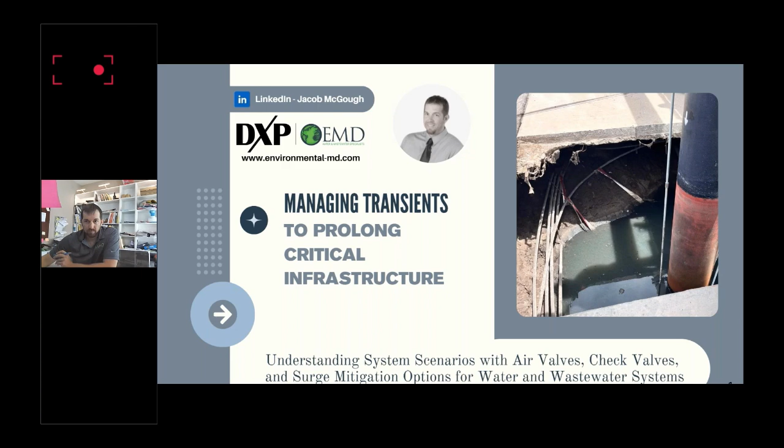Turn my camera off here and get to the presentation. So greetings, everyone. Hope you all enjoyed Ryan's presentation on gate valves and hydrants. Hopefully you guys learned something from that. Like Kurt said, I'm Jacob McGough. I also go by Jake. Just a little bit of a quick intro of myself.

Got my feet wet back in 2006 into the water industry with the manufacturer direct. 2010 shifted over to the manufacturer's rep role. So from 2010 to about 2019, I was out in the Rocky Mountain region. And then in 2019, I began working here in the Sunshine State with Environmental MD and Florida Valves. So my role is essentially as a manufacturer's rep, looking over the state of Florida for the principals that we represent and trying to get those into the market and help end users, engineers, and everyone in the industry, distributors, contractors, you name it.

So today, the presentation I'm going to be talking about is managing transients to prolong critical infrastructure, understanding system scenarios with air valves, check valves, and surge mitigation options for water and wastewater systems. It's quite a mouthful. This can be a touchy subject, so hopefully I hit some points and make some sense going forward as we all try to make things better as we build.

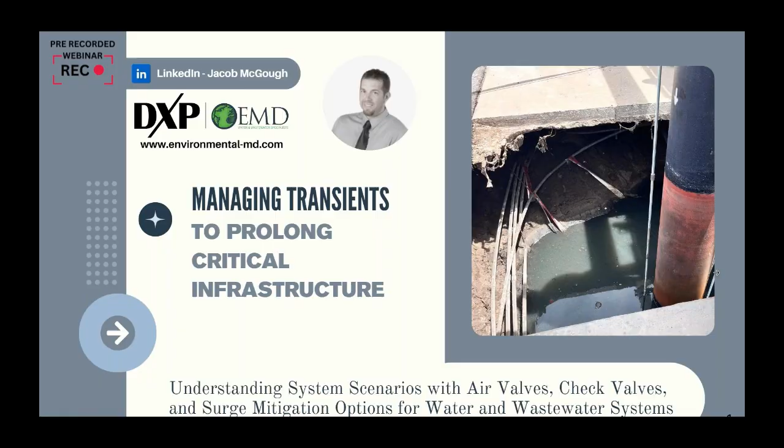So I'm going to start out here trying to approach this with the mindset of the ACT approach. If you guys walk away and try to remember anything at the end of this conversation, it's ACT: air valves, check valves, and transients. I've really focused on the transient portion, just because whether it's potable water or pressurized sewer force mains, it seems like there are a lot of issues out there. And not picking on Florida per se, but it's around the entire U.S.

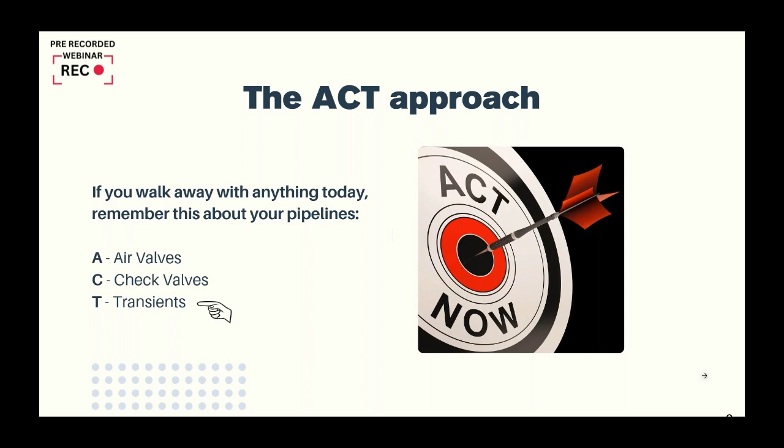So I'm going to peel into this, peel the curtain back over the next 3 slides, and then we'll go into a little bit more detail.

Understanding system scenarios. When we talk about a pump station or a pipeline, whether it's potable water or wastewater, typically we always think about normal operations. What we need to be considering also is worst case scenarios. So potable water and pressurized sewer force mains must be designed around worst case scenarios, under all operating conditions. And I stress that all operating conditions, and this includes pump trip. It is always best to have a computer surge analysis done, as there are quite frankly too many variables within a piping network. We've seen the hand calcs underpredict and we've seen them overpredict. So just something to keep in mind.

So where does this take us? Or maybe better yet, why do we need a surge analysis? Possibly to determine why the pipeline is breaking, maybe for new designs so the pipe doesn't break, or possibly to ensure that the pipeline stays pressurized to meet regulatory requirements. That's obviously on the potable water side of things.

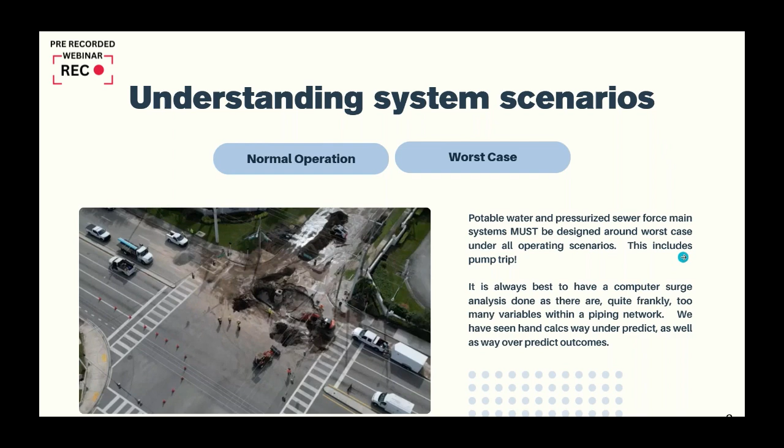So again, painting a picture here, kind of understanding system scenarios, and going through a couple of things before we really dive into some details.

It starts with the pump station, and we have a little layout. The layout of the pump station, we'll know pump curves and everything. Then we can figure out what the pipeline and profile is, what are the pipe materials, and obviously there's going to be pipe size with that as well.

On the potable water side of things, there's going to be storage tank levels possibly to be aware of, and then we need to know some operating scenarios.

So steady state is a term here, if you want to think of this as maybe normal operation. Inside of a hydraulic model, once the steady state is confirmed, then it can move to the next step at the engineering level.

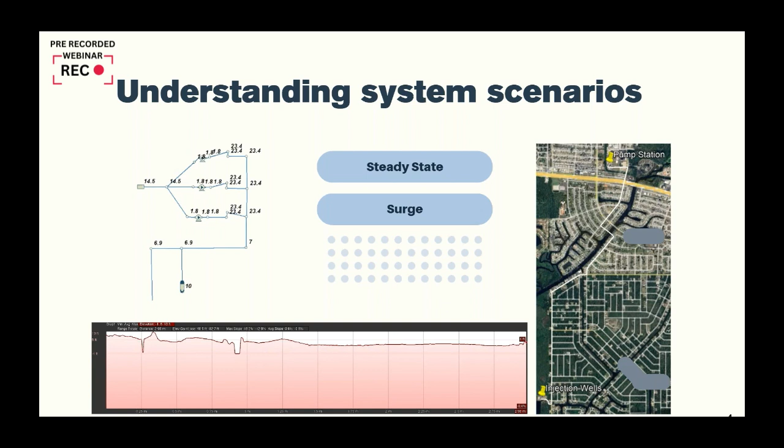For surge, which in most cases is usually the worst case, and it typically involves a pump trip. So with steady state complete, it's kind of time for a surge. I'm going to start out with the ACT for air valves here. We have a profile here with several air valves on it.

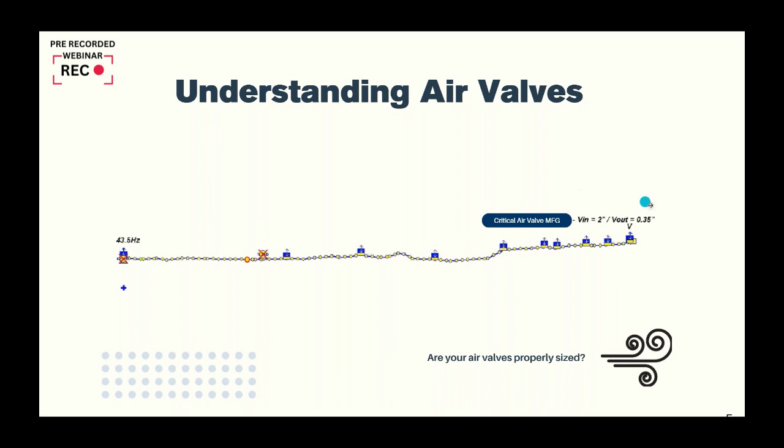And what I want to really point out is all of these air valves, technically they should be sized correctly. Now, there's usually a critical air valve or two in this system, and I like to point out and ask the question: are your air valves properly sized?

So before I get into that, I'm going to stop on the subject of air, confined space entry, and air valve air monitors.

Here in Florida, vaults and everything are kind of a little bit scarce, but I think it's a good subject to go over, throw a little safety in here with confined spaces. If you guys are ever in the field and entering an area considered a confined space, just make sure to check the air with a proper air monitor before you proceed into that confined space area.

Air valves, like Ryan said in his previous presentation, he referenced AWWA. Most valves have a standard that all the manufacturers have to conform to and meet those bare minimum standards. One thing most folks might not be familiar with is there's another standard that goes along with the air valve AWWA C512 standard, and it's the AWWA M51 manual.

Essentially, to pluck out something specific here, this basically says vacuum venting capacities for all air valve manufacturers state a design basis of 5 psi differential at 60 degrees Fahrenheit and a 0.6 coefficient to come up with the air valve CFM capabilities.

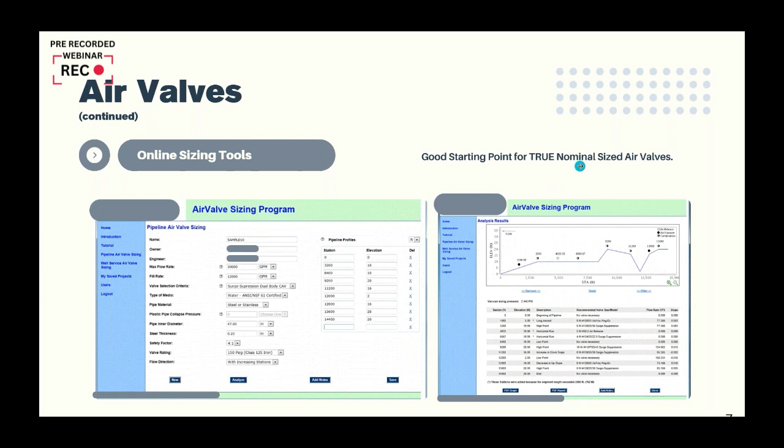But one thing here in Florida, we're quite flat with our topography, so slope is not as prevalent, if you want to say, but there are some areas that obviously have some hills and valleys. And this is a good starting point for true nominal sized air valves.

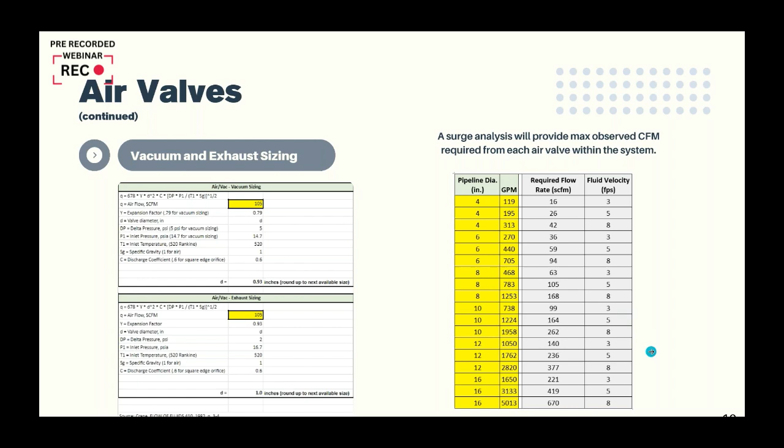So just to put this into perspective of what we talked about, I said a 20-inch diameter force main with this 4-inch riser I mentioned earlier. This is properly sized because on a 4-inch at 8 feet per second, we have 1048 CFM required if we're designing around max fluid velocity in a pressurized sewer force main.

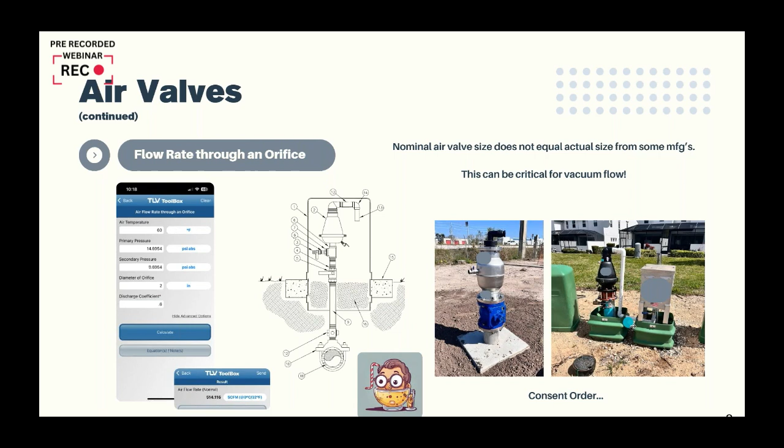Majority of the flows are designed around between that 3 and 5 feet per second. So even if we looked at the 5 feet per second mark, we need 655 CFM, which essentially equates to a 3-inch air valve. So we definitely have something in question here to look at with some of the air valves out in the field.

Taking this a step further and looking a bit more in depth, we went over a manual way of sizing air valves, a couple of different methods for checking true nominal sized air valves. The ultimate check, however, is to have a surge analysis done, which will tell each node inside that model where each node is at. You're going to have an air valve tied to it if that node has an air valve on it, and essentially we'll be able to see the exact CFM required.

Using a force main as an example, we can go out into the field. Consulting engineers can also do this, your EORs, and essentially walk or drive the line and figure out where all the air valves are at, just doing some discovery and investigating work. We can see right out of the gate, on this particular example we're looking at, we have nominal sized air valves that are called out, but the inlet outlets are different.

And these inlet outlets are quite critical when an engineer or a hydraulic modeler is inputting that data into the model for the surge analysis to be done, because these figures directly affect the outcome of what we're going to see. Again, just referencing, I've got a couple of keynotes here, 1, 2, and 3.

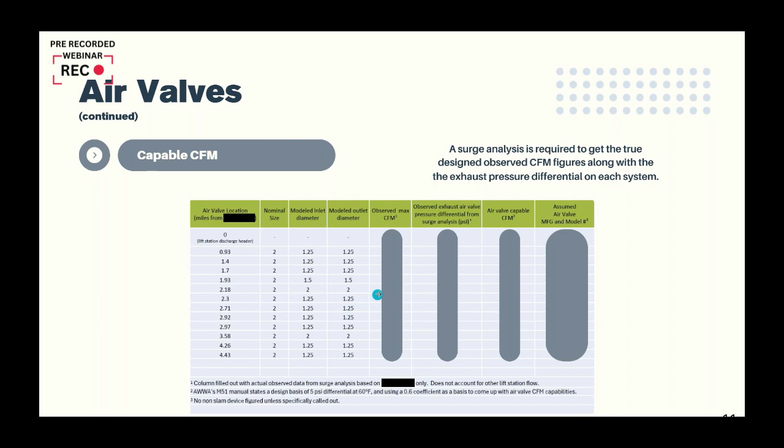Going back to this 2-stage, 3-stage concept and how these are modeled: if a hydraulic modeler is just modeling standard air valves, they're going to put not the nominal size, but the smallest orifice into the analysis software. Now if they are seeing air slam, the modeled inlet stays the larger inlet, but the modeled outlet will be modeled with a smaller figure to address that air slam event within the model, mitigating it so that when it gets into the field, the issue has been addressed. That's the term 2-stage, 3-stage.

I wanted to point that out. I really think going forward in the years to come, this is going to get a lot more traction and attention, and ultimately lead to - in Florida specifically, everything is driven around county or city standards, and then an APL is tied to that - I think performance-based language is going to have to be added to help mitigate and address potential larger issues that may be happening.

Hey Jay, so yeah, go ahead. I'm sorry, let me - I was trying to find a good time to jump in and ask this without interrupting you. Sorry about that. Kevin Smith, I'm just going to read his question here.

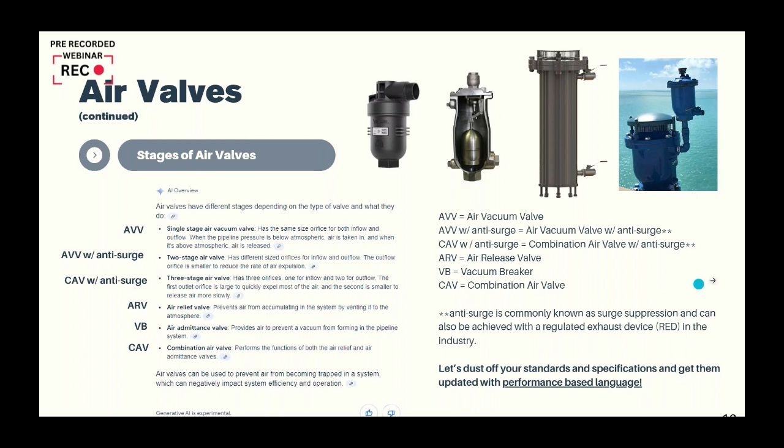He says, we don't size air valves based on the size of the riser, but rather on the size of the force main or transmission pipe. I noticed that you mentioned the riser 4-inch and the required CFM. This should be based on the 20-inch pipe instead, correct? Yeah, Kevin is correct, yes. Okay, yep, it's the airflow in the main pipe, correct? Or sorry, it's the fluid velocity or gallons per minute in the main pipe that we're pumping. Yes. Okay, very good, thank you. Yep.

So flipping over to check valves, this is the C in the ACT acronym that I mentioned earlier on. There's essentially 4 main criteria for check valve selection.

Check valves play a role in transients. They can help mitigate, and they can also induce transients with check valve slam. Proper selection of pump discharge check valve is critical in water and wastewater pumping systems. Its primary role is to open for forward flow and close to prevent reversal flow when the pump is off. To avoid check valve slam, which occurs when reversal flow suddenly stops, an automatic valve must close very fast, or use an oil dashpot device for slow closure.

Check valve closing speed is also dependent on system back pressure as well. Now, one thing I'll throw in here before I forget: medium speed is generally typically observed as bad, because that's where we will see check valve slam.

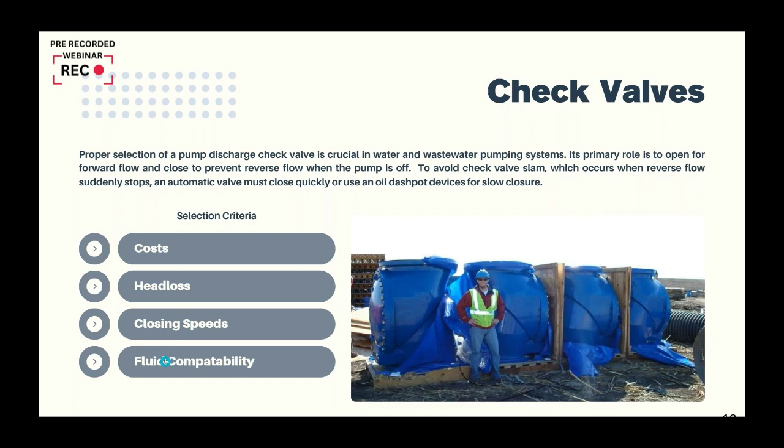Getting into the criteria here: cost, head loss, closing speeds, and fluid compatibility. Costs associated with check valve considerations for a system do come into play. Is it the best thing to base the design around? Probably not. There are a few pictures here.

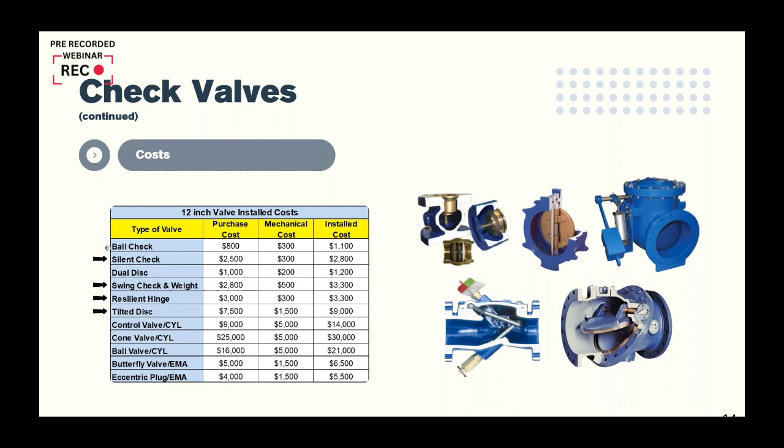I wish I had the Jeopardy music I could play right now. Hey, while we're waiting for that, Kurt, I'll tell a little safety story here also.

So a few years back, probably 16, 17 years ago, I was at a job site in New Mexico adjusting a large slide gate. And essentially what we had to do - the contractor took this whole thing apart and I had to put it back together and readjust this thing. This was a very large sluice gate, actually a cast iron sluice gate, and I'd adjust all the wedges.

After we got done adjusting all this and checking it out, essentially we had to pressure test it. That entailed raising the gate a little bit and then immediately closing it, just to kind of unwedge and wedge it back in to make sure it was going to seal. Problem is, we had one wedge slip on us. So I'm at the bottom of this containment area, 60 feet deep probably. There's a 40-foot extension ladder going down to a platform, and then another extension ladder leading up to that.

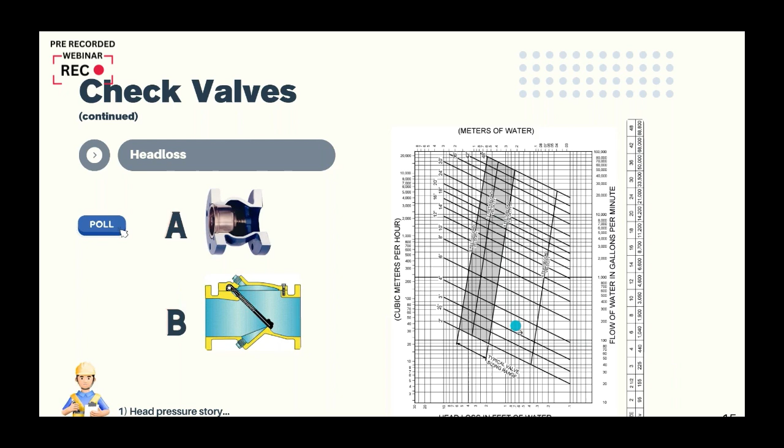The answer to this here was A. Obviously, everyone's correct. With check valves, every check valve has a head loss chart. That head loss chart also more than likely has the CV, which consulting engineers utilize to size correctly. So I just want to point out the head loss chart here, a typical head loss chart per se.

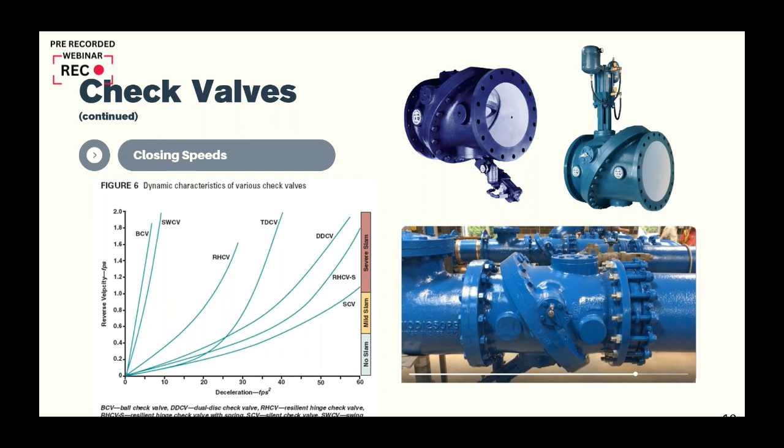So you guys, for these videos I'll play going forward, they don't have any sound, so I'll just narrate a little over them. This first one is fairly quick. Essentially what we're going to be doing is watching the check valves close, and there's this bottom mounted dashpot on there as well. So it's open now, and you see it closed—probably about a second there.

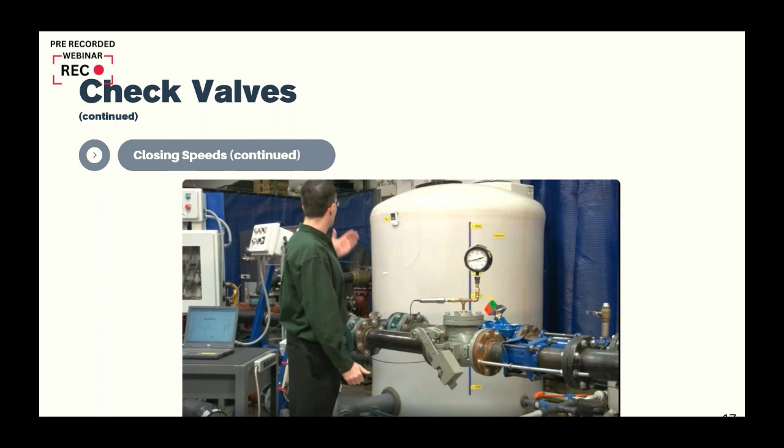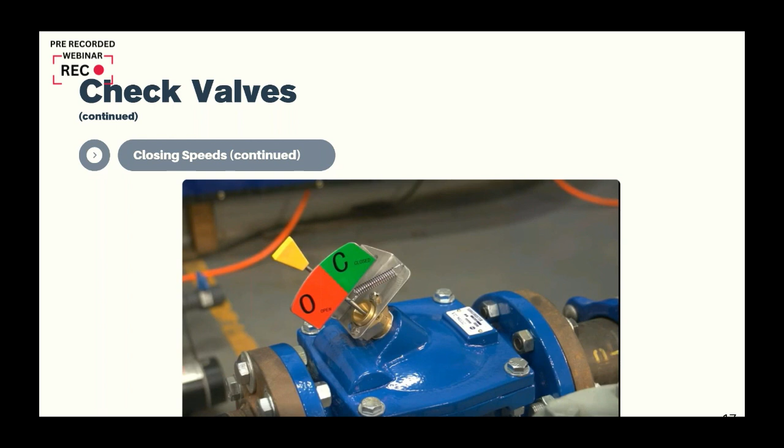So this next video here, we're going to watch two videos in series. The pumps are going to start. The flow is going to go through the check valve, and this pumping system is pumping into a hydro tank. There's a pressure switch on that hydro tank, which once we get pressurized up—I think in this case it's 80 PSI to that tank—that switch will essentially trip the pump, and then we'll see what happens to the system here. Feet per second was displayed there. Pressure is going to get to 80.

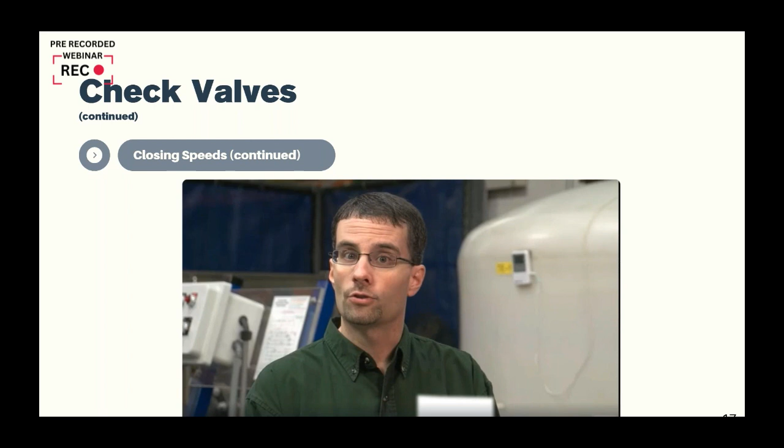And essentially we have silent closure. There's really no audible slam with the resilient hinge check valve with this spring. We can see what happened here with the pressure monitoring, measuring at the transient level. When I say pressure monitoring at the transient level, that device is essentially measuring at 100 samples per second, so it gets a really good resolution. We can see over static, we really only bumped 20 PSI, so that's a pretty soft closure.

The other thing we want to watch for, whether doing lab tests or field tests, are these closing times—how fast did that check valve close, or how long did it take to close. In this case, that resilient hinge check valve with the internal spring closed rather quickly, so we didn't get any pressure spikes here.

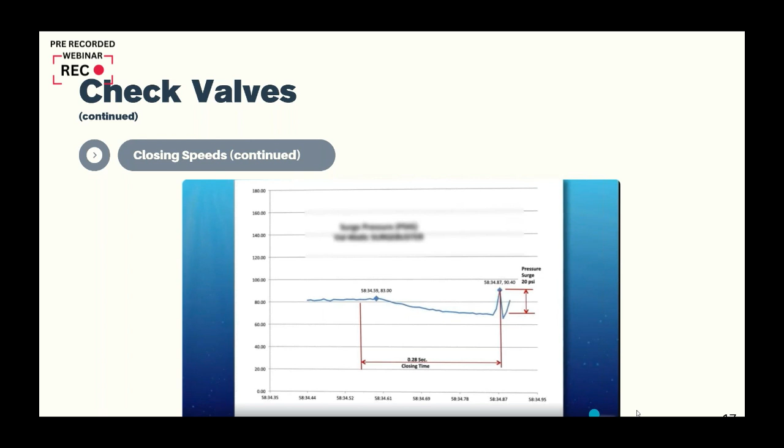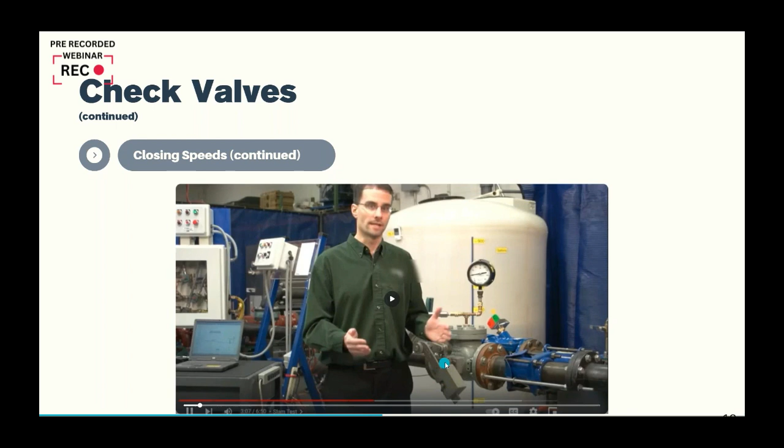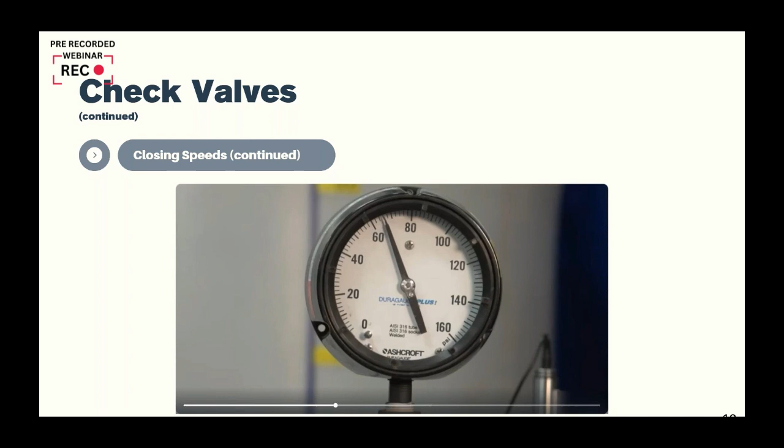So this second video, we're going to watch the same thing, but instead with a conventional lever and weight check valve with an air cushion, if you guys can see that in this picture here. Again, the flow is going to go through the check valve into the hydro tank. We've got our flow in feet per second, and we're going to hit 80 PSI.

You can see some shaking in this piping system. So with that slam over static, we have a 90 PSI over static, and our closure time was a lot longer. What was that first one? I think 0.28, so almost 3 times the closure rate.

So selecting the correct check valve for the system it's going into does play a key role.

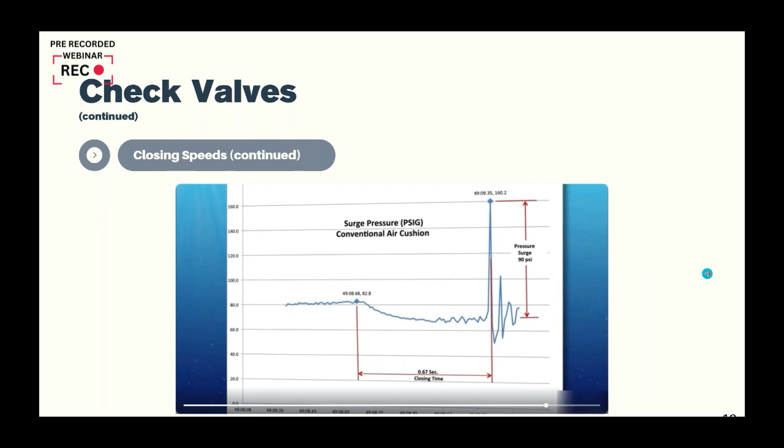And the last thing on check valves here, just fluid compatibility. Is the valve going into solids or wastewater, or is it going into potable water, or maybe even reclaimed water? It just kind of depends on what the application is and the media it's going into.

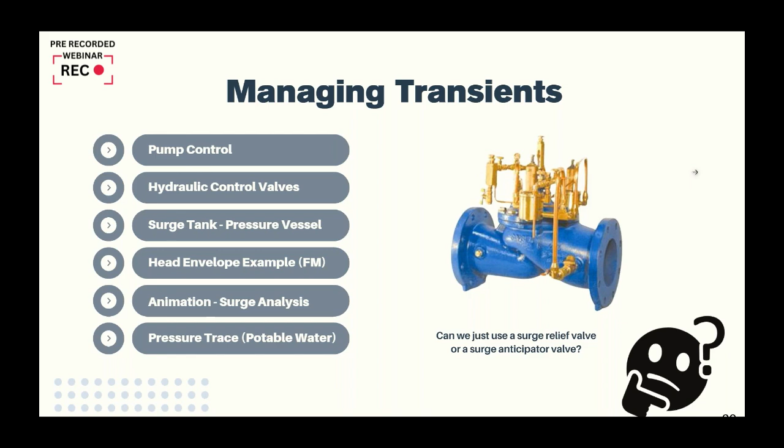So now we're going to jump over to transients, managing transients in a system. So we've got a valve here on the screen, and I like to ask the question: can we just use a surge relief valve or a surge anticipator valve on my system, and will my system be fine? The answer to that question is maybe, and we'll dive into that here.

So managing transients, pump control. Mitigating transients during a pump startup sometimes involves a pump control valve and is not just reliant on a pump VFD to mitigate transients. VFDs sometimes can be finicky, and sometimes we do want the ability to essentially achieve smooth linear flow into the pipeline to mitigate those startup transients when the pump does first kick on, during normal operation even.

Secondly, something to watch out for is a backup generator can sometimes cause a transient issue in the system. I know here in Florida, some stations, pretty much every one of them probably has a backup generator, but how often does that backup generator kick on? And is that backup generator programmed correctly to not induce transients into the pipeline?

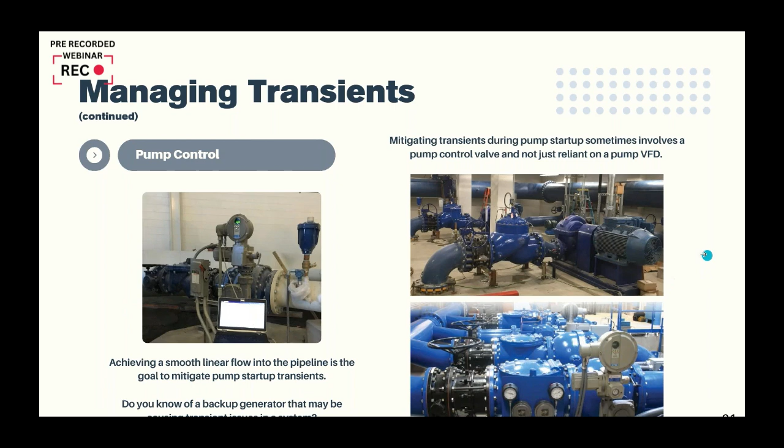So hydraulic control valves, I'm not going to lie, these are probably the most fun valve to work on. They can look intimidating at times, but you just have to be the water and figure them out.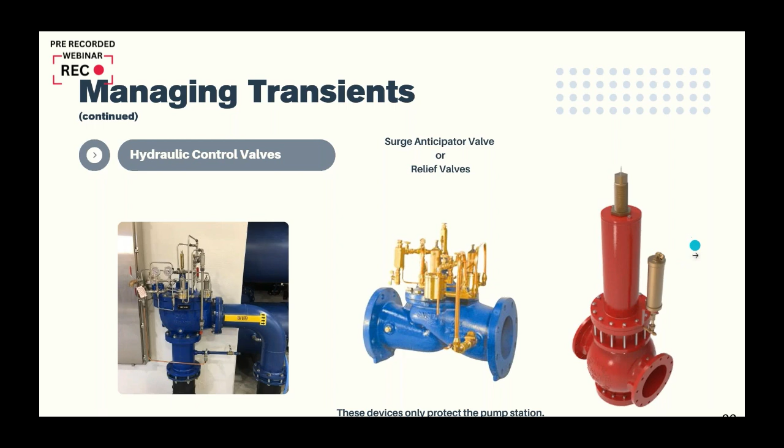Surge tanks and pressure vessels. I've got a little safety guy here, I'll cover this real quick. These are ASME pressure vessels. You can see on the screen here where my mouse is at — there should be a label on there that addresses and identifies these as ASME pressure vessels when they are out in the field, whether they are used for surge or even pump cycle. They're still an ASME pressure vessel.

One thing I will point out, if you guys ever come across one of these or walk up on one, just make sure that there is a small relief valve on these per boiler code. That relief valve is required because that is a pressure vessel. Also with that little relief valve I'm mentioning, make sure there's not an isolation valve between that relief valve and the tank itself. That relief valve should be directly coupled to the water or pressure connection of that tank, and there should be no means to isolate it. It is there for a true safety point, because these pressure vessels are designed to a PSI, whatever the operating pressure is.

Second thing too with these vessels, you can see here in the cartoon or picture, these can get fairly tall. Just general ladder safety, make sure you guys are tying things off if you're crawling up or doing anything to something high up in the air.

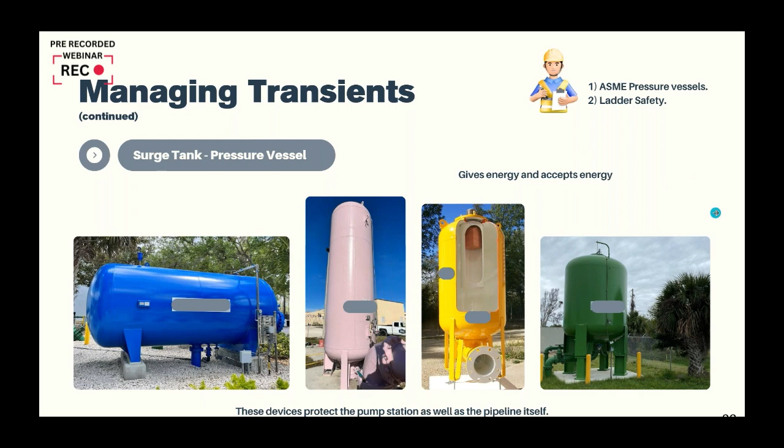The fourth picture here, we have a bladder-style wastewater vessel, very similar to what the potable water side or vessel would be designed around. In potable water, the water goes inside of the bladder, the air is on the outside. It's just reversed on the wastewater side of things: the air goes in the bladder and the sewage goes in the tank. So just a couple of things to point out when you guys see one of these in the field - these are surge tanks or pump cycle tanks typically.

So managing transients, we just went over some mitigation equipment. So what are we looking for? It's not all about the pump station or the lift station. Everyone needs to be considering the entire system as a whole, because we have a whole distribution, transmission main, or force main system to also consider.

Utility departments must be communicating. I think that's key here.

Kurt, you want to take a little poll here? So your interdepartmental communications there in utilities - give us your rating, 1 being bad and 10 being the best. How well are your departments communicating? Go ahead into the questions section and just give us a number there.

7, 8, 9 - good, these are good numbers. A couple more 9s. We have a 5, a 7, two 8s, two 9s, an 8, a 9. Good, most of these are high numbers, that's good to hear. Okay, so a 10 - we have a 10. All right, I want to talk to that one. Cool, that's good to hear too.

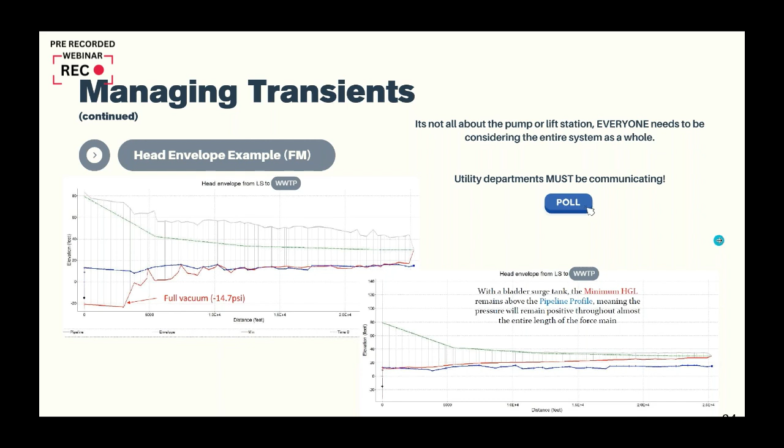Okay, this is a nice animation. I will do my best to quickly talk about what's going on here - a lay of the land with this animation. We can see the pressures all along the top. We can see that this pipeline here is 5,000 foot long.

And we have our hydraulic grade line, which is the line in green here. So essentially, this is a pipeline that is drawn up that has no air valves, no surge mitigation equipment, and is relatively flat. Here in Florida, everything is relatively flat. So just keep in mind what we're watching here. As you can see, every time that hydraulic grade line goes below the pipe, the pressure in the pipe is negative. When it bottoms out, that's full vacuum.

You can pretty much see that all along this pipeline in this cartoon example with no mitigation equipment, this whole pipeline is going negative and experiencing full vacuum. Now, these black lines inside here that are starting to dance around, that is water column separation happening inside of the pipe. And when that water column separation happens, and then when it rejoins or connects back up, you're going to see the pressure spikes essentially create this massive head envelope way up top here.

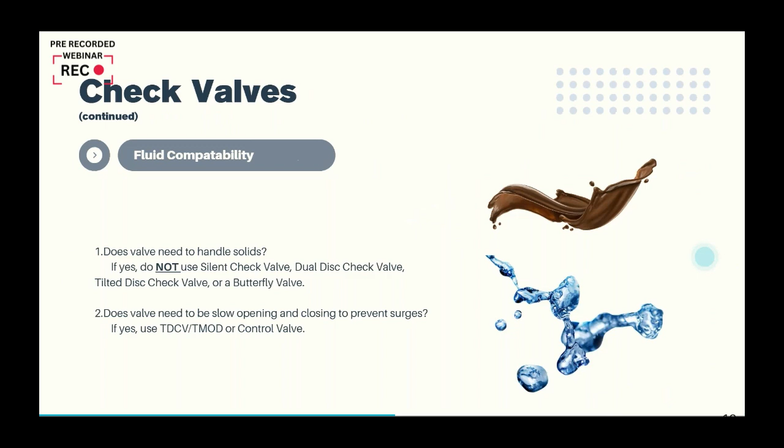Typically, this is a force main. So typically force mains, we've seen, depending on pipe materials, that is key here. Systems can be designed on this force main to go down to -5, which is considered acceptable in some cases. It probably more than likely will not be acceptable beyond that. But this is what we look for inside of these.

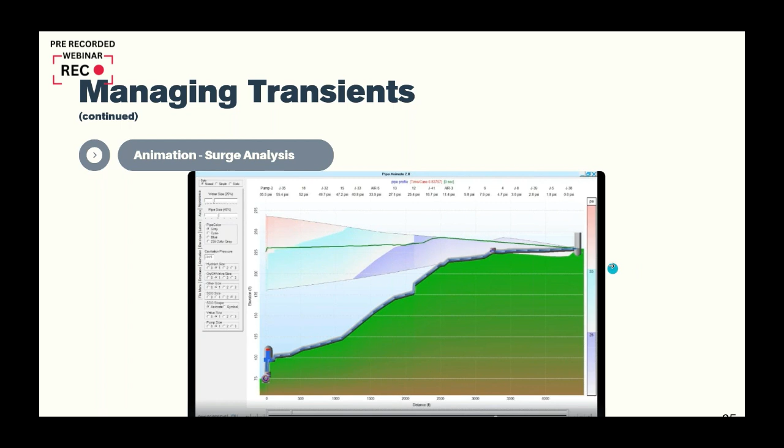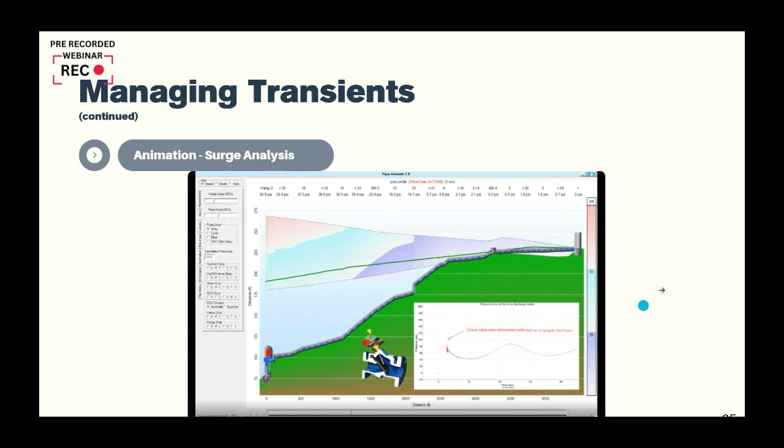Now, the solution here and what we ended up doing, obviously we still have the surge tank here. We added a critical air valve here that was properly selected. And then to get rid of that spike from the check valve slam, from the pressure being put back into the system from the surge tank, we changed that check valve up to a resilient hinged one with a stainless steel internal spring.

So on the potable water side of things, pressure traces, I'll go through 3 scenarios here. When a pump station is hydraulically modeled and put into a surge analysis software, a lot of the times we'll look at what is happening at the pump station via the pressure trace. So worst case, we put the E-stop, we got one pump running, we can see what's happening. However, out in the system, we probably have an issue here in the trouble area.

And this particular system had an issue here, and they kept breaking pipes out in the system. So you can see the pressure trace at the pump station, just kind of being a node trace here, and then using a node trace out where their troubled areas were. We can also see they're still having issues. And this is just one pump.

So let's say there were multiple pumps that were able to run via SCADA. Now we can kind of see what's happening at the pump station and also happening out in the distribution system. Now, obviously, we're below a 20 PSI mark. So this is below or considered not meeting regulatory requirements. And 2 pumps, obviously, is even worse than the first pump. So again, we can see via the pressure nodes, kind of where we're at and what's going on.

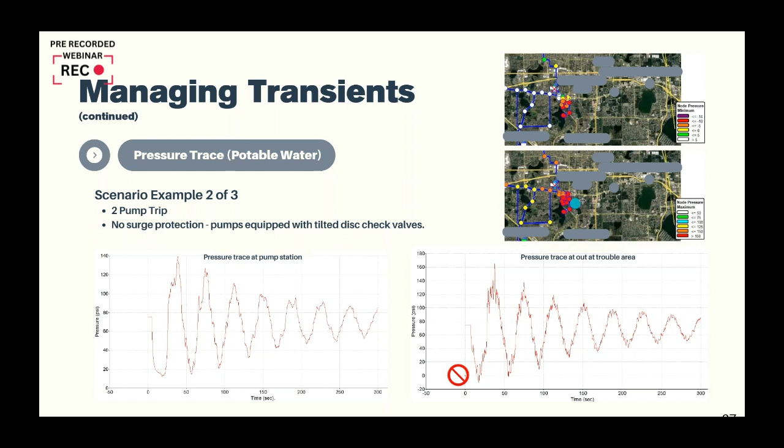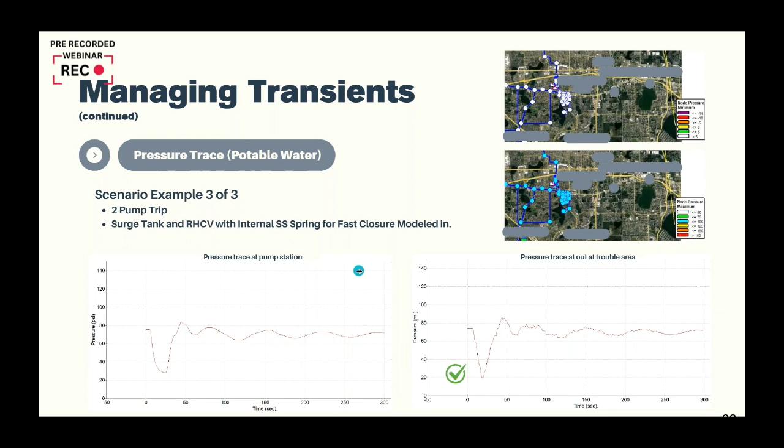Lastly, what do we do to fix this? It did take a surge tank with, again, a resilient hinge check valve with an internal stainless steel spring for fast closure, which is what was modeled in. And now you can see we're now meeting that regulatory requirement.

So transient monitoring equipment - what if you wanted to actually see what was going on versus just maybe relying or believing the surge analysis? There are ways to do this with deploying field equipment. Obviously, what you can see here is we have hydrant options, or there are hydrant options out in the market.

We can also field deploy at the pump station devices, or maybe out in the field and just tap the pipe or hook up to an air valve and put that component on the air valve assembly, or maybe hide it in a meter box. The same thing goes for monitoring pressures at a lift station - we can also figure out what's going on or further diagnose what is going on there.

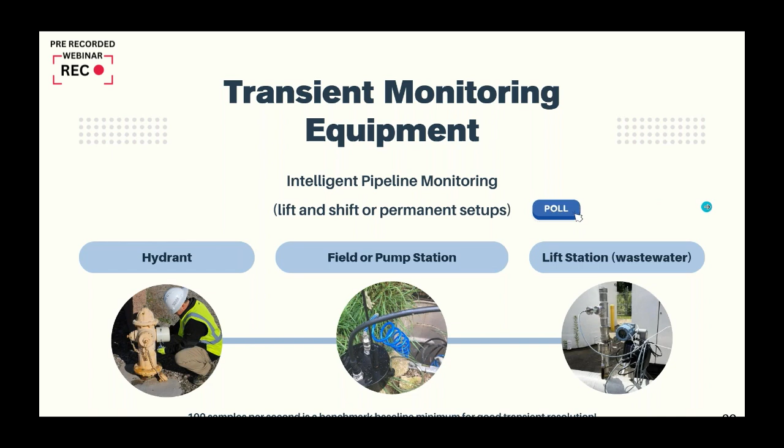The key here is 100 samples per second is the benchmark. It's a good minimum to get good resolution to see that transient, those transient pressures. Yes, there are manufacturers that go way higher, but with that, a lot of these components are installed out in the field, and all you're doing essentially is killing your battery quicker in the long run. So it does require more runs to the field with your folks.

So model calibration and network calming, using a force main as an example here, we can kind of see what's going on. This is high resolution data captured during normal operation. You can see here we got a full -9 on this example of a screenshot, and then we can see the wave speeds. When we have good resolution and wave speeds, we can essentially help calibrate a model and dial in the pressure trace to what we're seeing under normal operations, and then go to worst case, which is pump failure or power loss at a pump station.

Now, believe it or not, this -9 is not the first time I've captured a -9 from field data here in Florida.

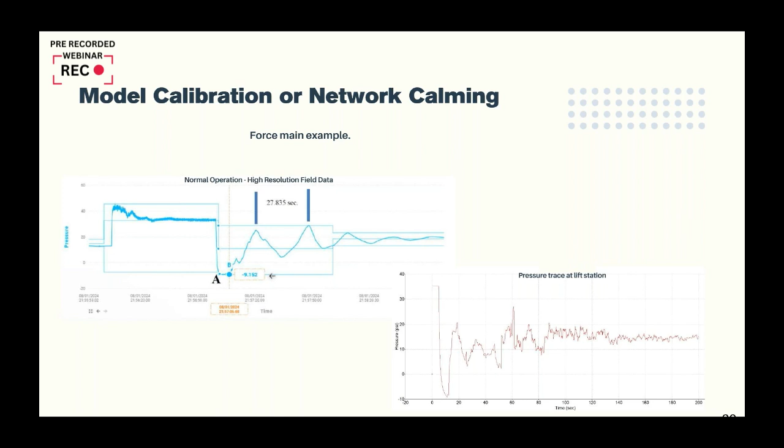Network calming kind of is the key here on this next slide. Triangulation is, I think, a really powerful tool. With multiple units deployed, and with high frequency and clock accuracy, we get really good resolution. Tied with GIS data, with the software running in the background, we can essentially land a flag and say your transient was likely induced from this location. Now, this is not AI, but there are algorithms running in the background doing this work for utilities to help further diagnose. So it's essentially like a second set of eyes on your system running in the background.

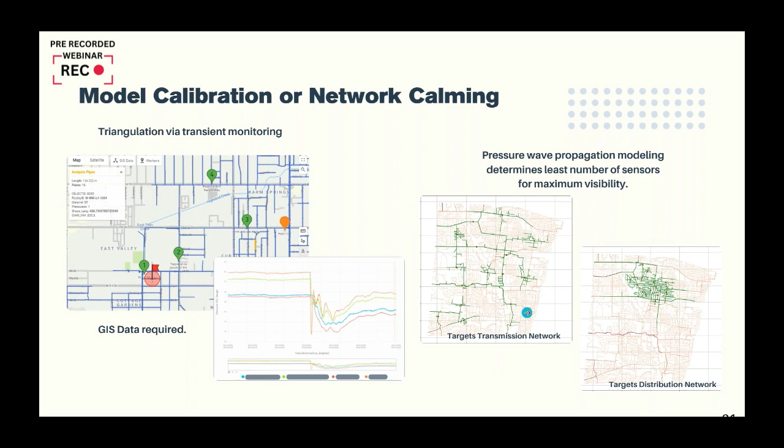To deploy these studies or projects, obviously we need to do a deployment plan, and we can do those on transmission mains and distribution systems as well.

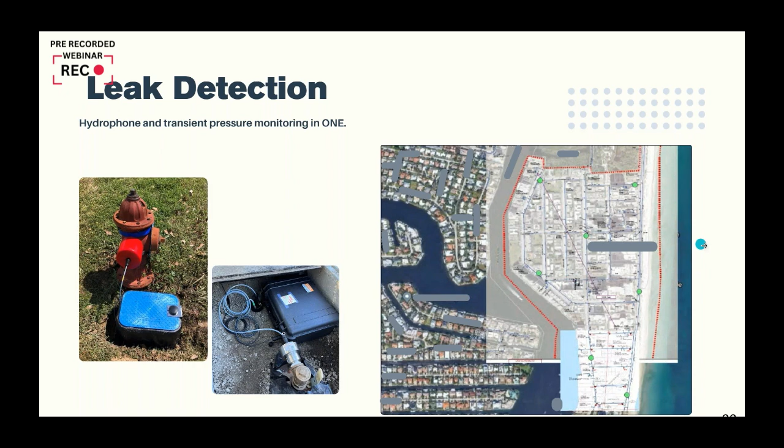Leak detection also comes into play, supporting those water loss programs. The non-revenue water - obviously everybody's trying to maybe figure that out. The technology's here, the device is at the edge to help engage with your network. It's like a radar for your pipes. So just kind of putting that out there. If you guys want to learn more, feel free to reach out.

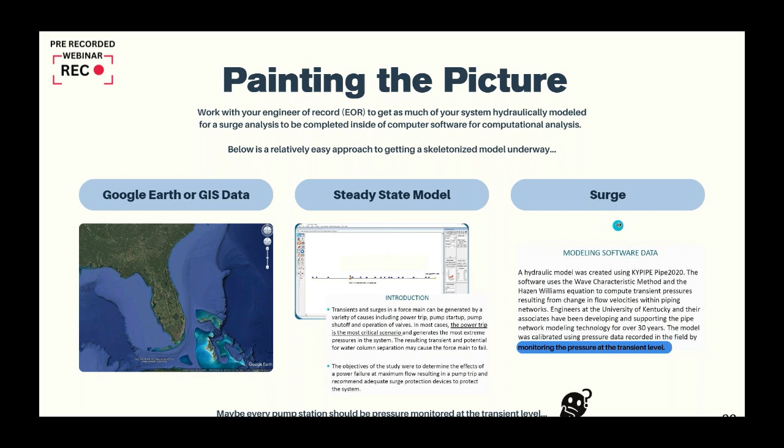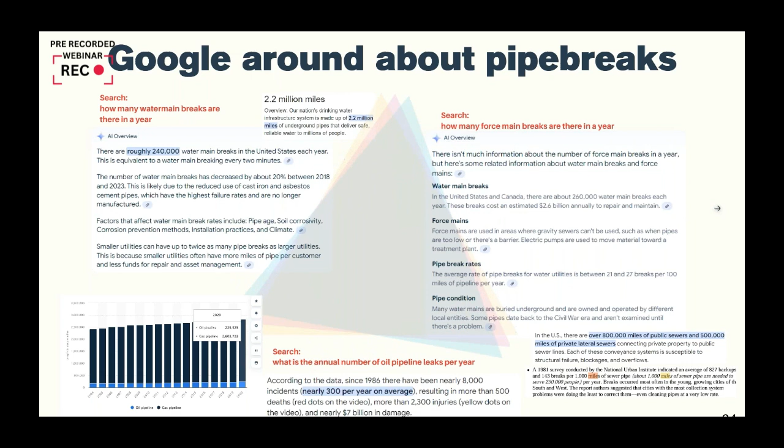But when we step outside of our industry from the water, wastewater, and we look over at the oil industry - now granted this data is from 1986 - they state 300, on average, breaks per year. There's a huge gap here in what's going on. So what are they doing and what are we not doing in our systems? I think that's the question, and I think that's maybe something that we all might want to take a peek at.

Lastly, there was a good abstract from ACE 18. If you guys would like a copy of this, I am happy to share it. Dr. Robert Lashir did a pretty good abstract on this. Essentially it dials down and sums up in the first 2 pages, but it does have a lot to do with microfractures, and microfractures are caused by water hammer. There are other things too that go along with this, but that's the leading thing that really sticks out.

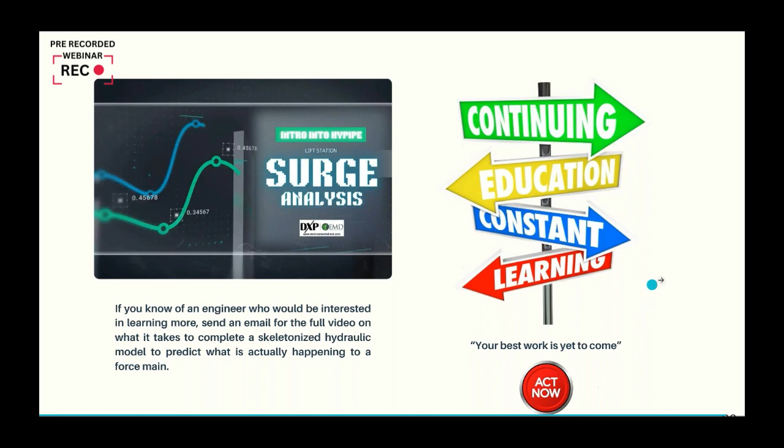This is a great intro here. We do have a nice example here of how to do a surge analysis. If you guys have a city engineer or a consulting engineer that may be interested, happy to share this as well. And as always, I do hope you guys all continue to educate, constant learn. This is not an easy button, but we do need to act now on air valves, check valves, and transients. And everyone's best work is yet to come.